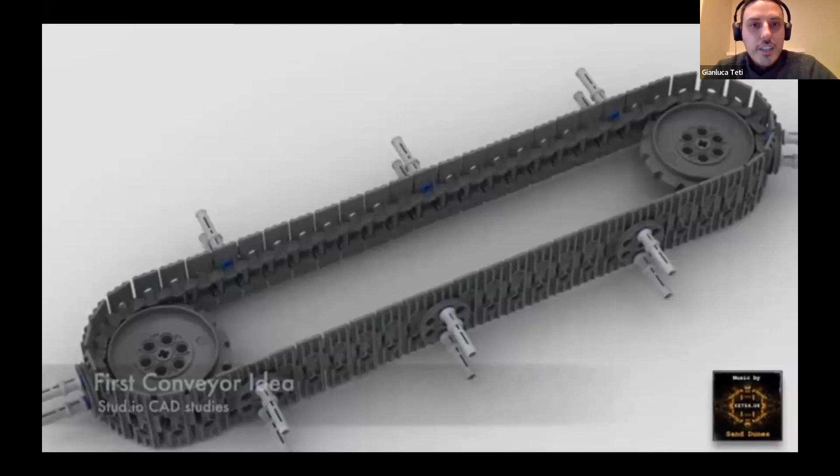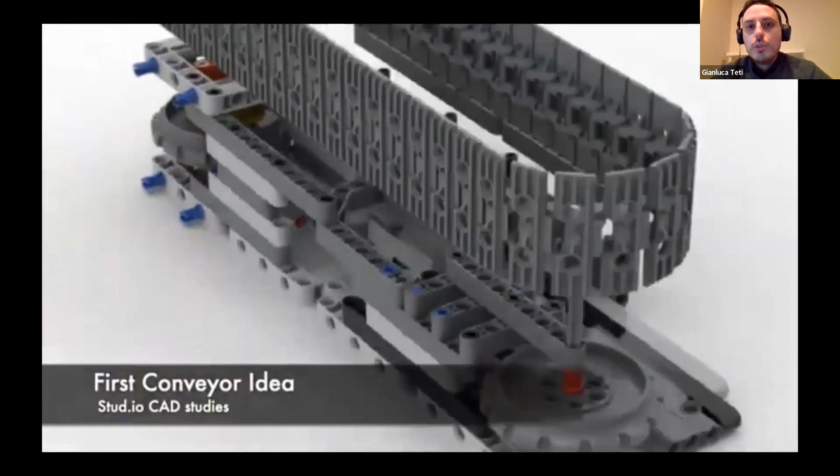I'm going to help myself with a video we made. Sorry for the presentation, we had little time to do it, so bear with us. This is the history of our Lego development, the mechanical part. Since we didn't have the Lego set yet, all we could do was think outside the box and imagine how the components could fit in reality, drawing everything in Stud.io. We started thinking about how to handle bottles, the moving conveyor, and how to better do it.

One quick interruption, sorry. No problem - the audience may still be confused about what the project does. In a few sentences, could you explain the goal of the project so we can understand this much better? What is the final output we want to achieve?

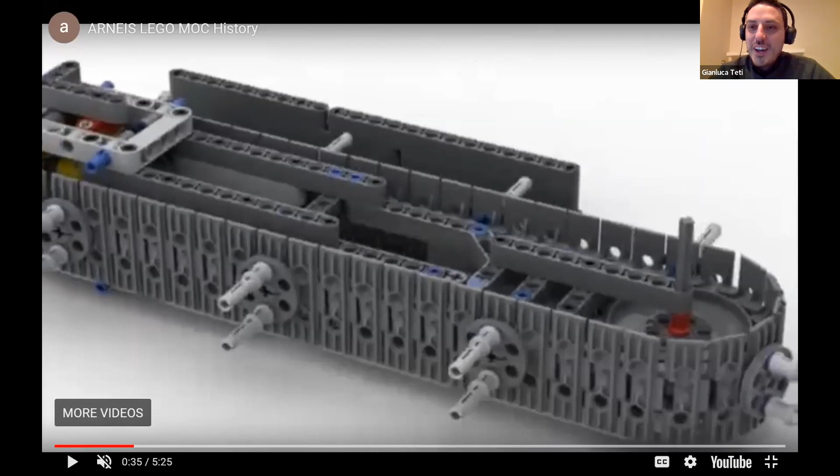We want to recognize mignon bottles that move on a conveyor, to identify and select some of the bottles present and create a sales packaging. So if you want to order 3 bottles for grandma at home, you just open the app and select the 3 bottles, and the system will see which bottles are running on the conveyor, pick the ones you want, put them in a packaging, and help the sales process.

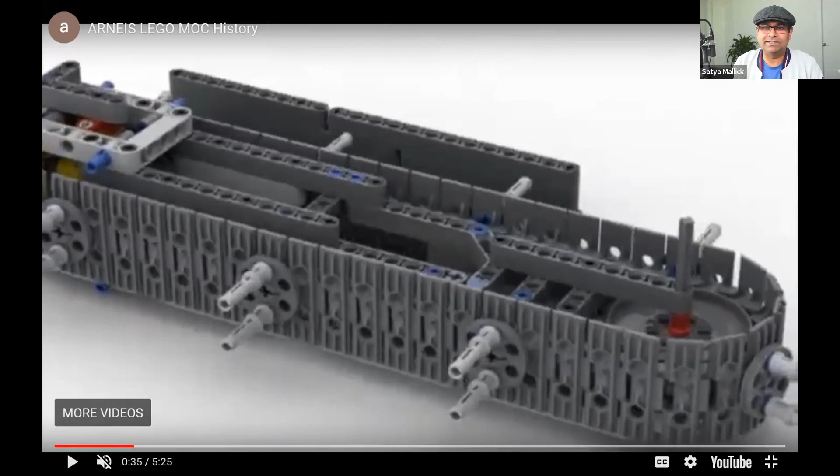So like an online gift site, they order 3, and you have the option of selecting specific bottles - not everybody gets the same package. Out of, say, 10 different bottles, your system recognizes the different wines, picks the right ones from the conveyor belt, puts them in a package, and ships it to the client. For now we're starting with 5 bottles, and the package should have 3. Of course the system will improve over time.

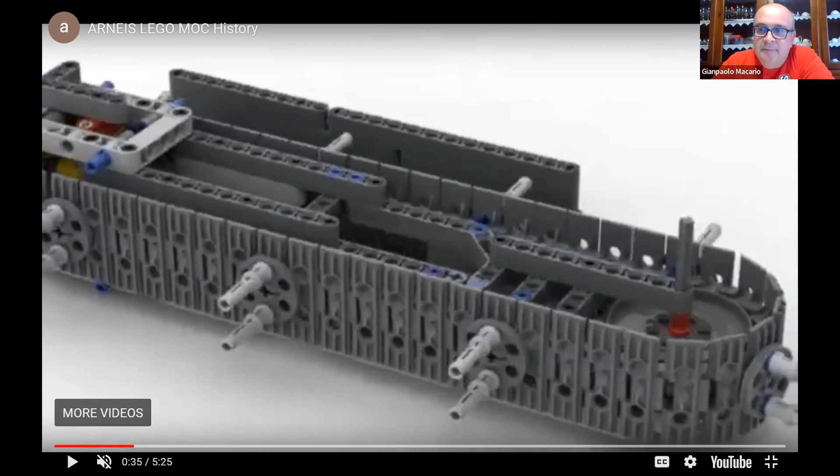Currently, packaging systems do the same thing, but they need to classify the items in advance - maybe coming from a batch or whatever. In our example, we want to stress the computer vision to identify the component while the system is running, and also learn by experience. If there are mistakes at the beginning, you take a snapshot, put it on the cloud, and reinforce the learning. This removes one problem of current packaging systems that need pre-training or labels. In our case we don't have any barcodes - they're all samples, no barcodes because they weren't done before.

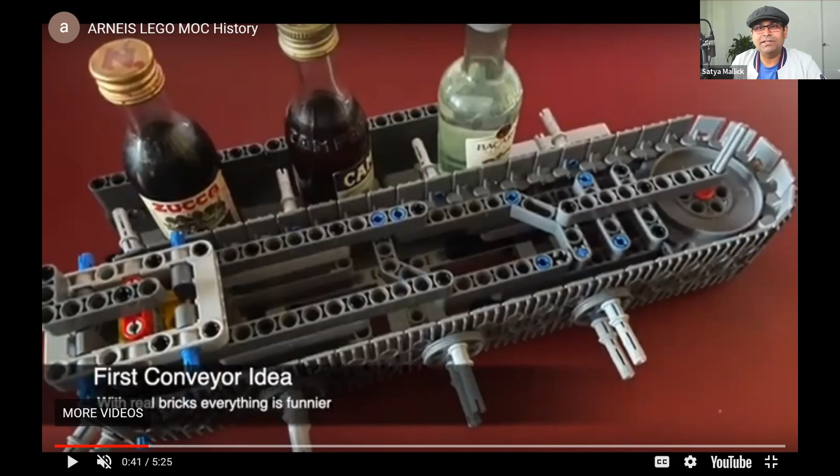So sooner or later we'll be acquired by Amazon and become millionaires - but this is exactly the problem they solve every day. Amazon would just end up paying somebody to slap a barcode on there. No, you'd be surprised how much automation is in these warehouses. It's mind-boggling. Yeah, it's one of the big adopters of autonomous robot tech - these giant warehouses from Amazon, Target, Walmart and so on.

Anyway, the problem to solve is to improve automation by removing the effort needed to prepare for it. Like in our bottling machines, we're asked to change the bottle we want to close for the same reason - we need to do training, which is really expensive and takes time.

Yeah, I will continue with the video. So this is the first realization of the first design.

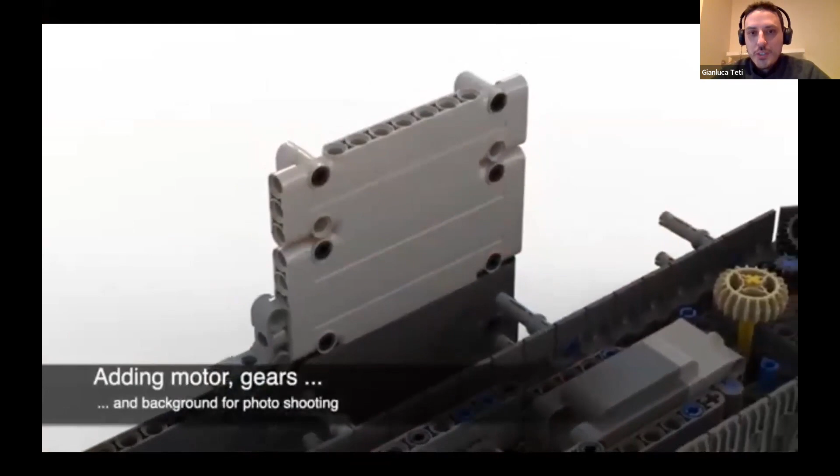Then we added the motors with the help of gearing. Once we had the Legos, we could start finally the building process and testing of the movements.

We decided on a part of a conveyor where we wanted the OAK-D Lite to look at a specific layout of a specific part without the landscape behind.

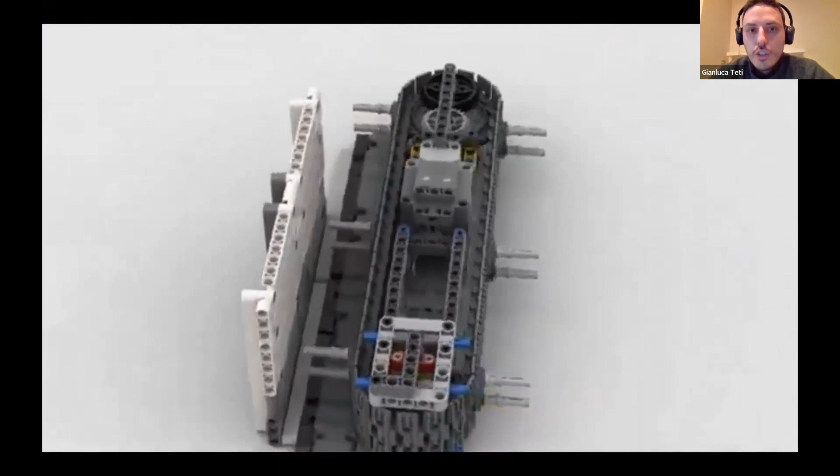LDraw helps with the animation, of course. This is not made by us, but also helps with the manual instructions. So if you are into that, please use it. It's very friendly and easy to use.

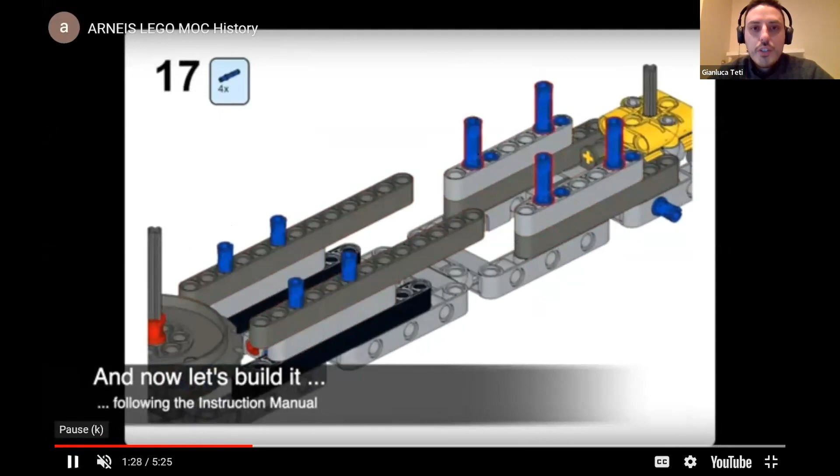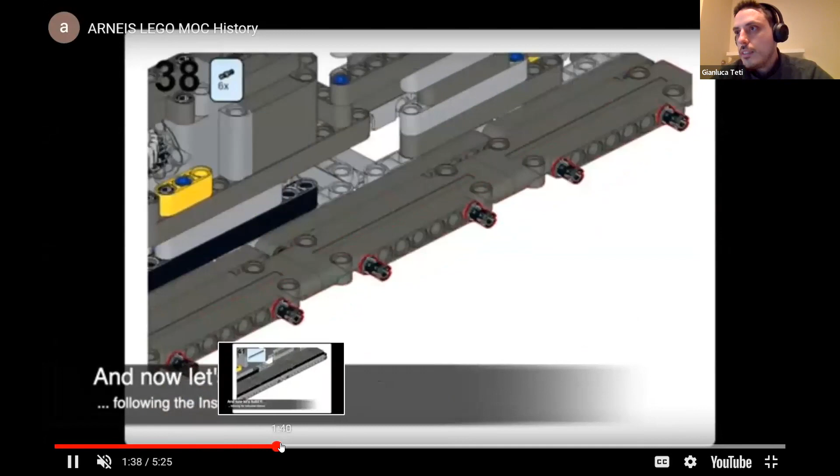Every step came with a bit of testing and new ideas on how to improve the design. I'm going to leave it at that a bit. This is a part of the conveyor. Okay, stop it.

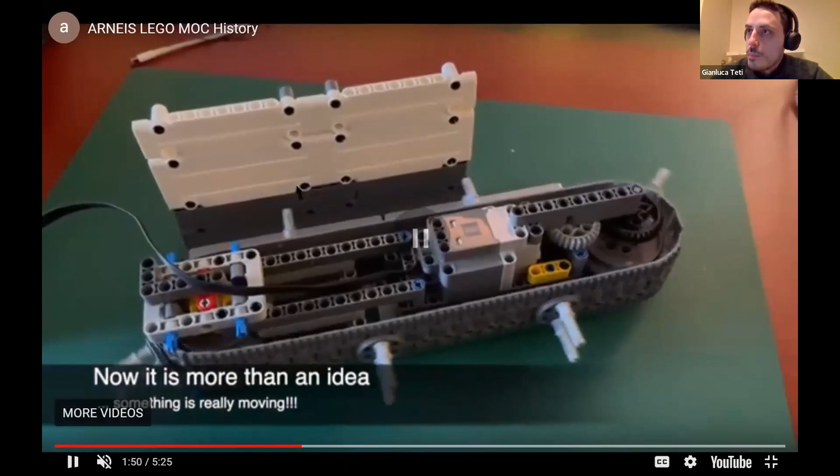Ideally, the OAK-D Lite will look at this part here, exactly where you should see my mouse. You will see that later.

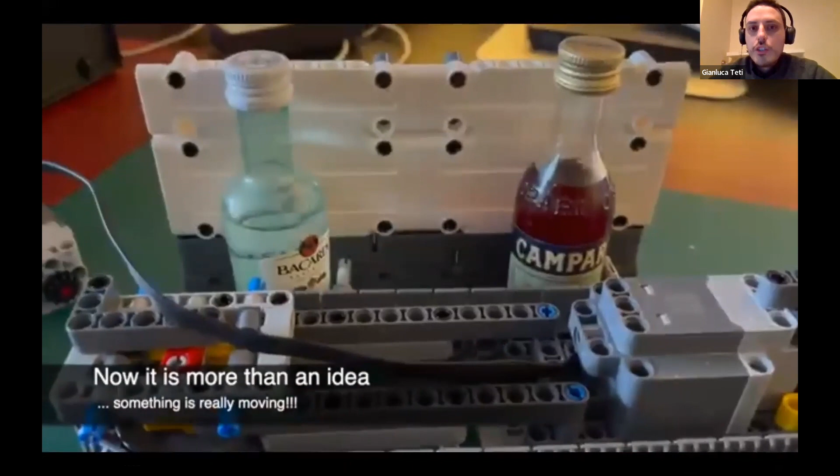We even tried the demo AI software coming from Luxonis, of course, and here you can see that. Is that running? I think it was running YOLO probably. No, I think the basic MobileNet. MobileNet, right? Yeah, the standard, the first network that you see when you start the demo software.

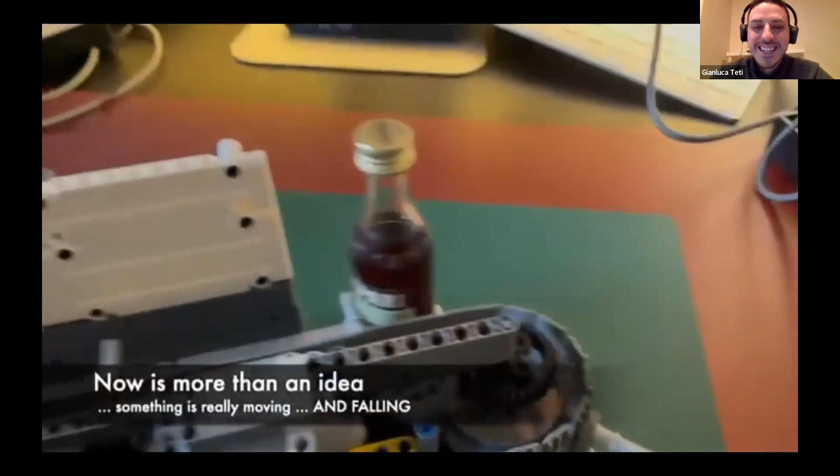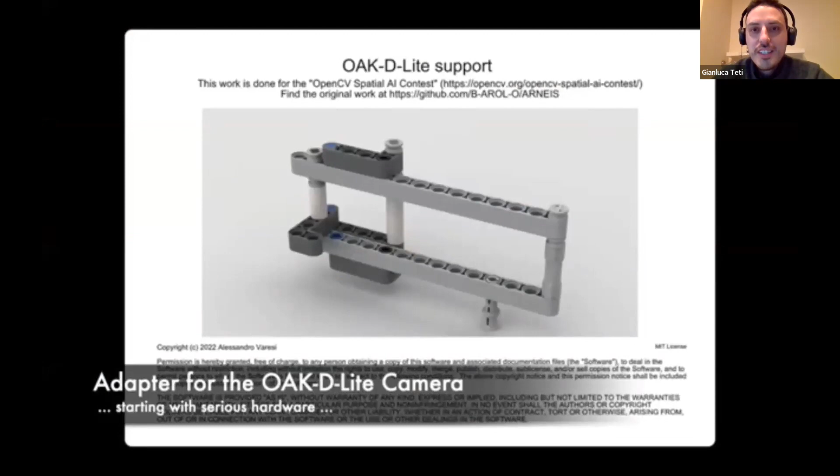Running just depthai.py. So something was finally moving, even dropping. At the same time, we started to imagine where we could position the OAK-D Lite and fit it with the other Lego parts, and so we designed a Lego support system for the OAK-D Lite.

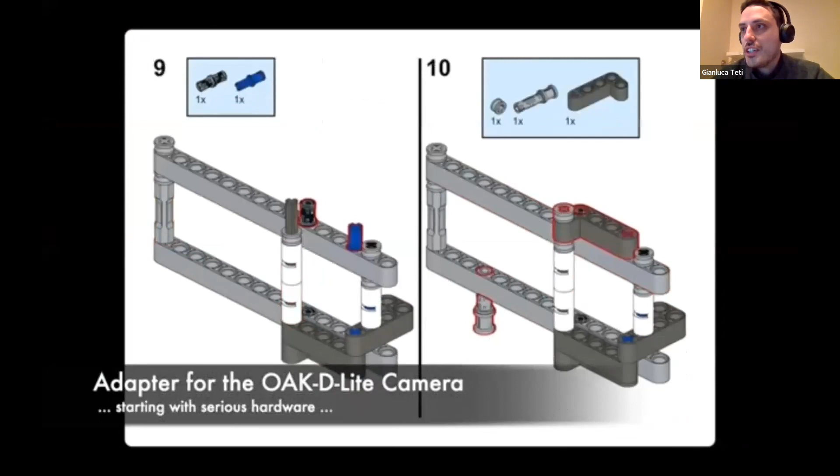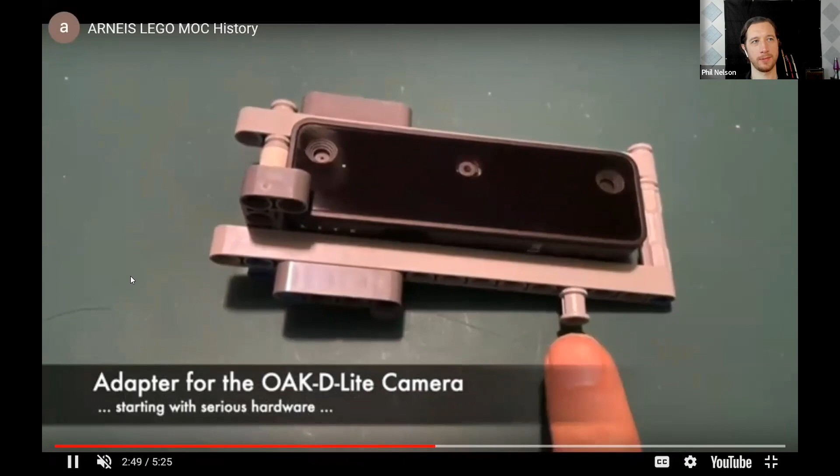In my opinion, it's very easy to handle the camera. You just have one piece that handles and stops the camera from dropping out, and you have plenty of space for the USB cable. So it's very easy to build, really a piece of engineering from Alessandro. So thanks to him.

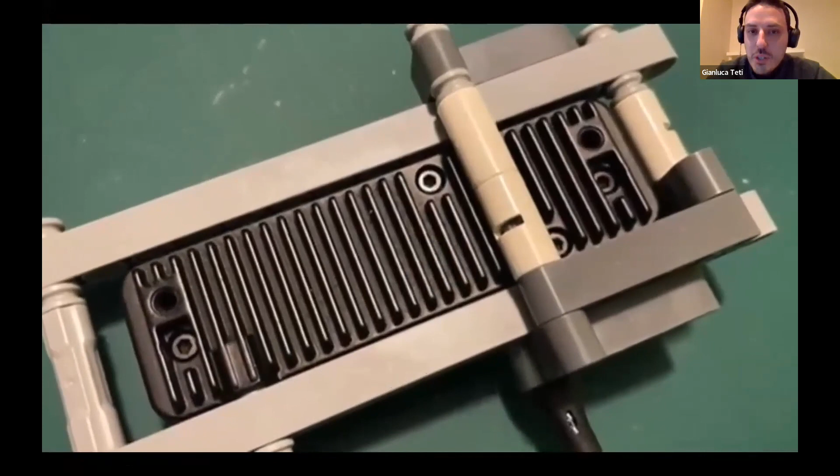One important note on the back here is that you've got to keep the back open for thermal reasons. Some of the projects we saw had a closed back, and it's not good. You've got to let the camera breathe a little bit. Yeah, I realized that the first time.

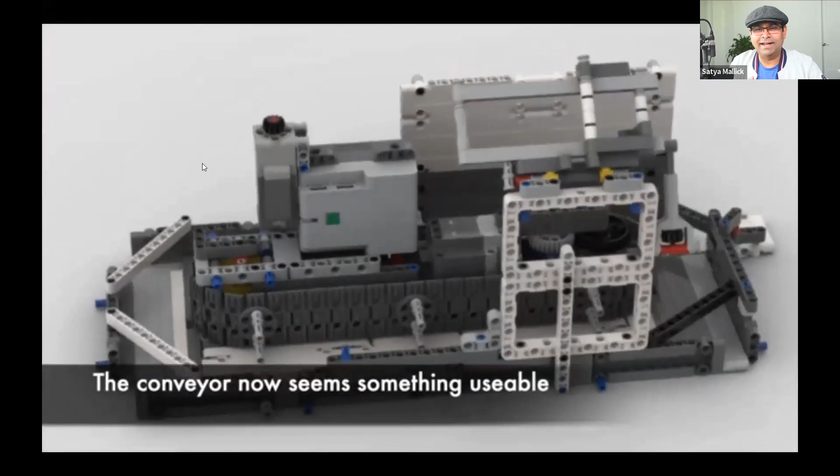Then it was time to add all the pieces together to complete the conveyor. Can I add one more thing? So many people have bought OAK-D Lites. One of the reasons for the metal case is that it's also a radiator — it actually helps cooling it down.

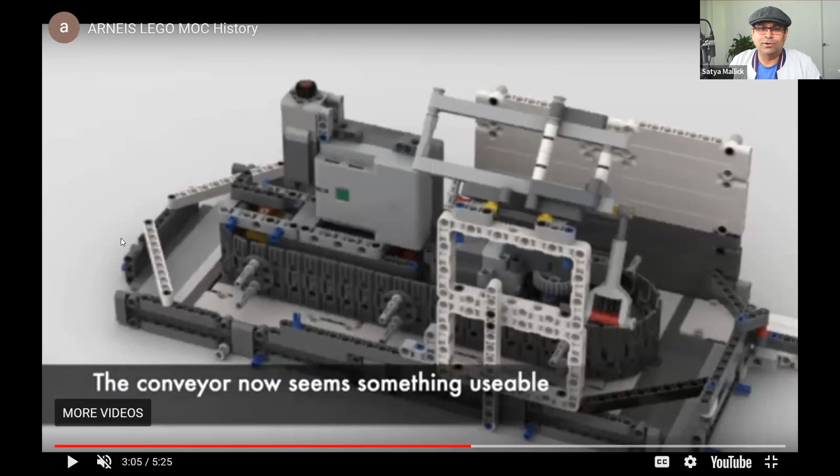So while using it, don't cover it completely, leave enough space so it can cool down. This thing can get pretty warm sometimes, depending on what you're doing. The OAK-D Lite, being a small form factor, can get warm, so keep it open when handling it. Honestly, this is one trick we as engineers doing a real job knew very well, and that's why we started with this design.

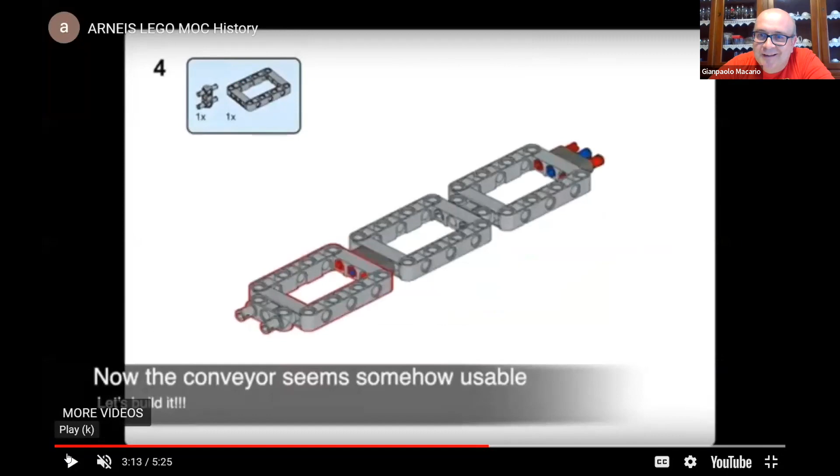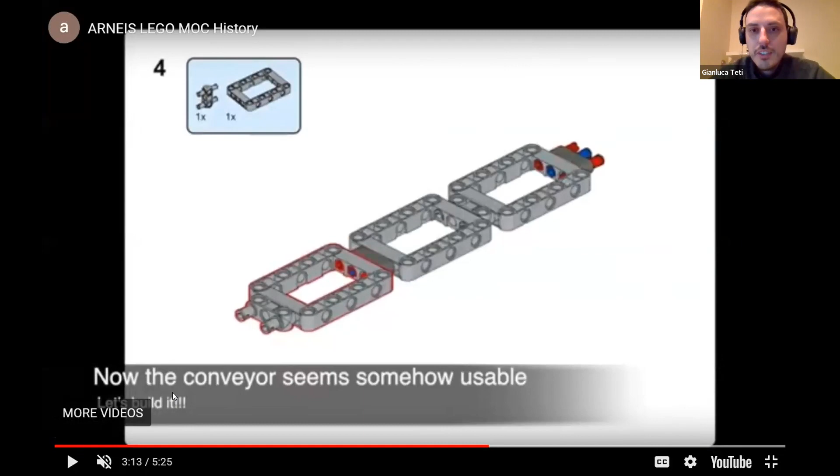But we did it in Lego, and usually we don't put in plastic. Right. So as I was saying, it was time to put all the pieces together to complete the conveyor, and here is the instruction manual rendering.

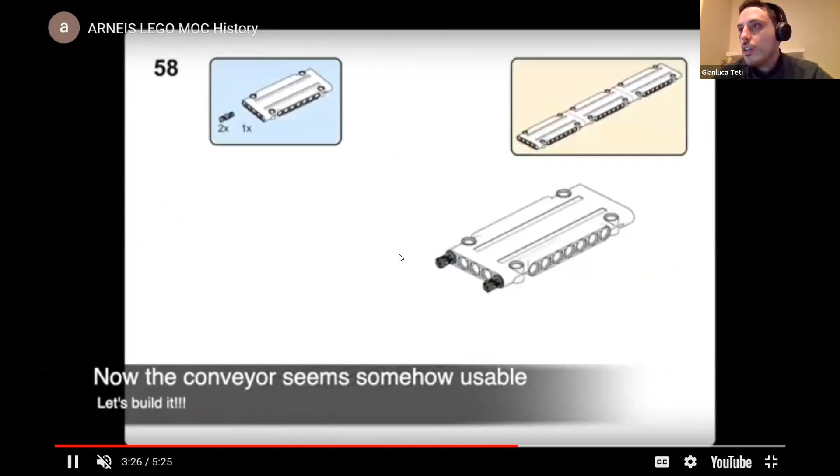The user just had to decide, after building it, where the conveyor should move. It has a function that can move forward or backward. You can see that in a bit. It's a gear on top of the motors.

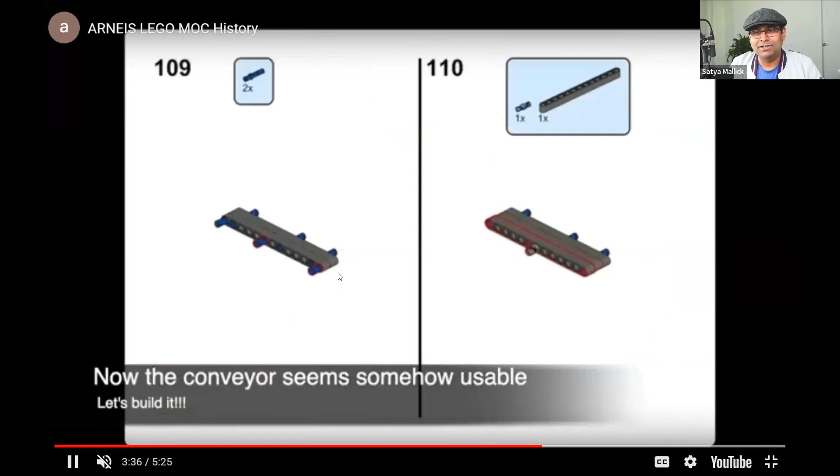What I really like about your project is also that we had shipping problems, so you could not get the real components. I don't know when you received it, or if you're still receiving parts of it. You still don't have all of them, but you were able to design all these things as 3D models, and that didn't stop you from making progress. That's really, really good.

Honestly, this is how Italians work. Yeah, we see opportunity instead of problems. Problems every day, and we're trying to be creative and solve them as we can. Nice. We are not, but we're trying to improve.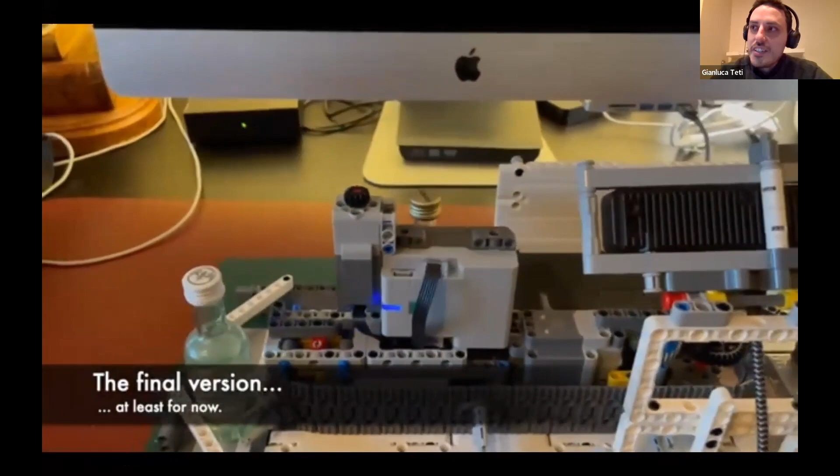So this is a first test of the running model. That's the gear that sets the movement forward or backward. You can see you've got some nice little rails on there so the bottles don't fall out.

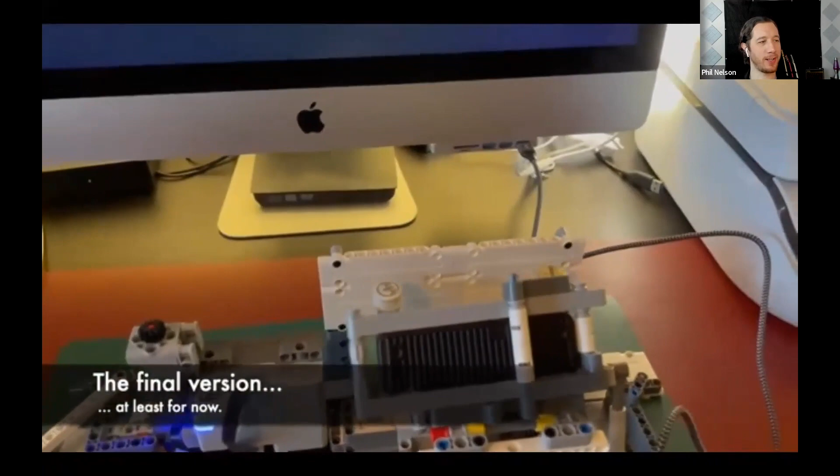It's solved bug number one already. That's the first one, of course. We have a little bit less edge on the next part. This is the final version. Me being the sales guy, I'll say everything will be solved by the end of the contest, of course.

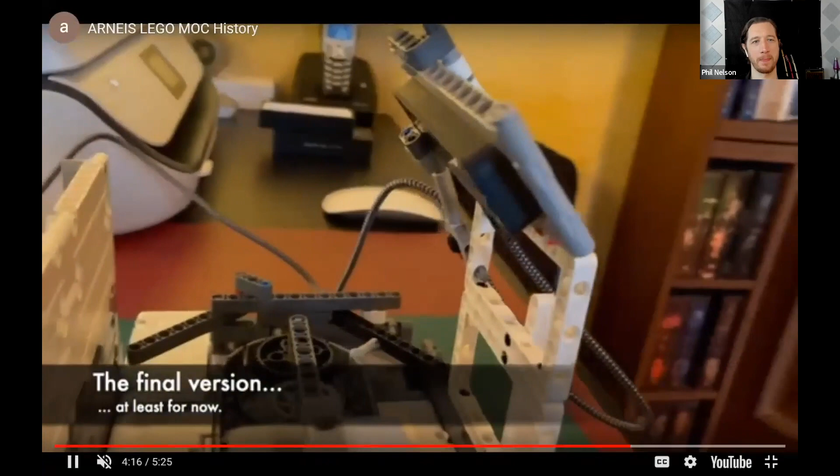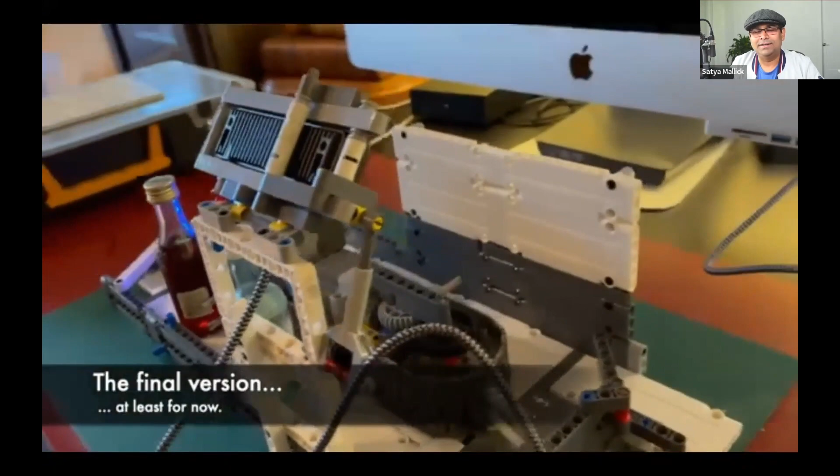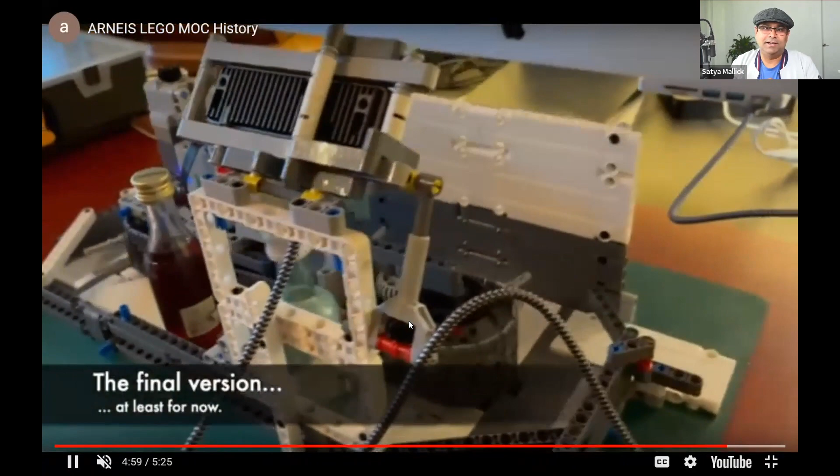The other thing I wanted to point out is that you guys clearly have a lot of industrial and mechanical design experience, but you're relatively new to AI, and this is the opportunity in AI. People from other fields who may be experts elsewhere add some AI expertise to their work, and suddenly they reach the top, because there are many fields where they don't have AI experts in-house. So you have the opportunity as an expert in some other field to add AI to your work, and suddenly your career path can become very lucrative and interesting.

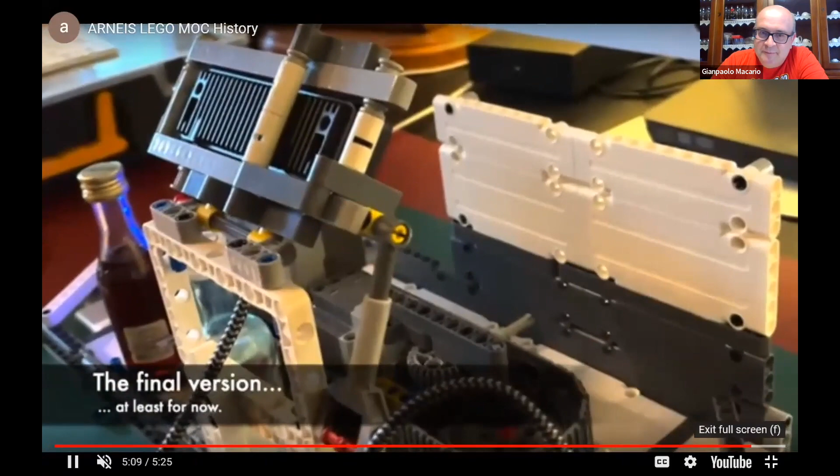This is the part our boss will not like, but this is exactly why we spend our nights and weekends, because we believe in it.

I'd like to point out that none of us is a mechanical engineer. We are two automation engineers and a software engineer, so the mechanical design is just a piece of genius. But we talk with real mechanical engineers every day, that's why we're aware of the problems, and we're trying to solve them elegantly with Legos.

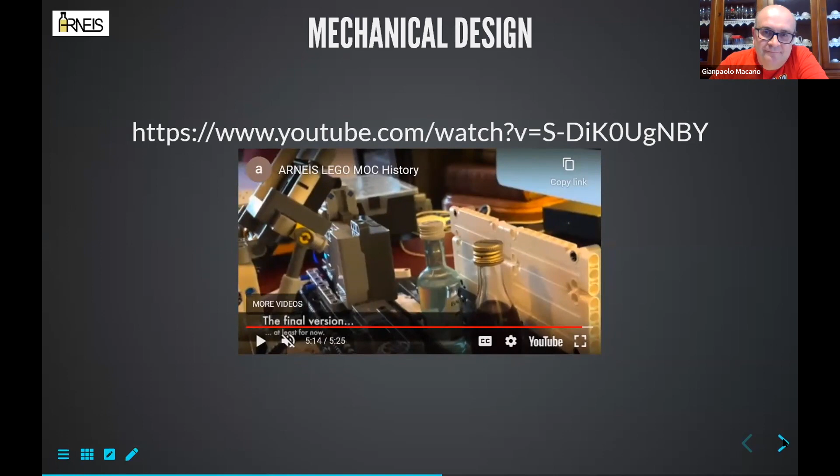So for the next part, at the same time we were working on the software. I'll take a step back: it was Christmas time, and we just learned that we would be one of the 50 teams competing in the OpenCV Spatial AI contest. Personally, I didn't know much about it.

Sorry, I went too far. Sorry, okay, I didn't know much about OpenCV.

So the first thing I did, like any newcomer, was go on Google and search for OpenCV. The first thing that came up was a link to the OpenCV YouTube channel, a 3-hour course that I took entirely in my own time, away from my job. And this is the first result I got using my computer camera - that's me, of course.

And after that, like Alice in Wonderland, we started to follow the white rabbit down the hole of a new, exciting world. We didn't know anything about DepthAI, TensorFlow, training neural networks, or machine learning applications - it was all a new world to us.

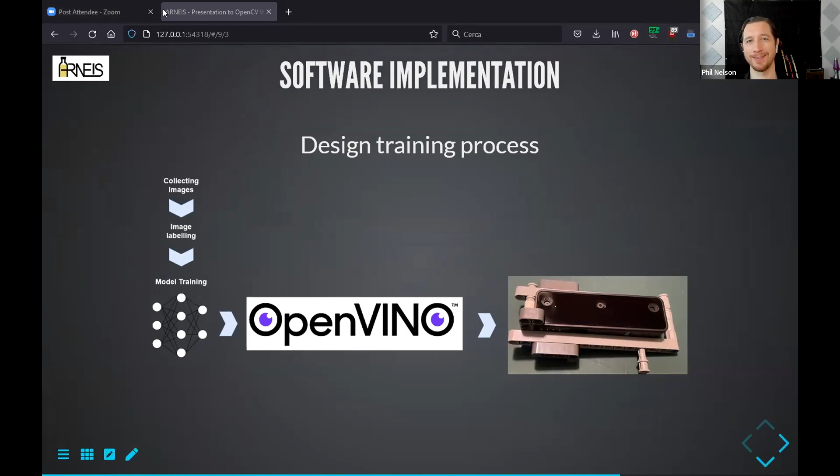After all those magic steps, and believe me, not so easy steps, you can finally use OpenVINO to convert the trained frozen model and obtain a blob file to run inside the Oak-D Lite. The OpenVINO step is very important for performance and many other reasons - another one of our good friends. Without using the OpenVINO step, you cannot run on the Oak-D Lite.

But OpenVINO is also useful for running it on your own CPUs. Let's say you have an Intel CPU and you want to make it very fast. I have done it several times in our projects where we get 2x, 3x speedup for free by just using OpenVINO, and the accuracy decreases very marginally, if any. So something to consider when you're deploying on CPUs especially, which, by the way, for deployment, CPUs, VPUs, etc. are used a lot. GPUs are so expensive, GPU instances are so expensive, that a lot of computer vision is actually deployed on CPUs. And for that, definitely use OpenVINO.

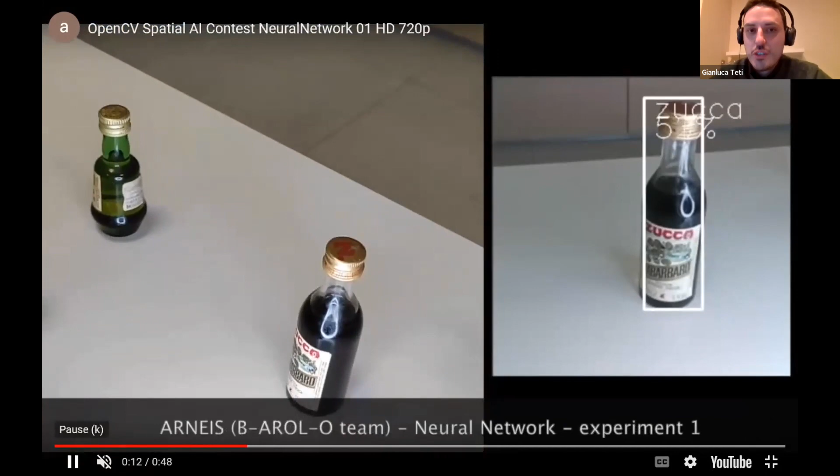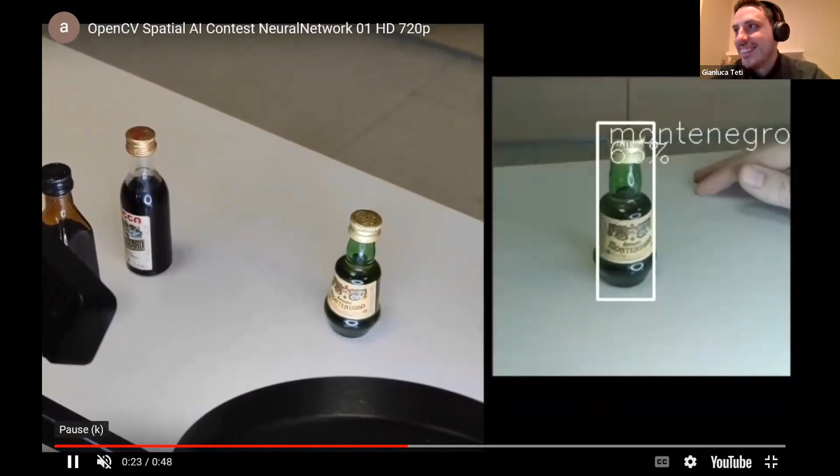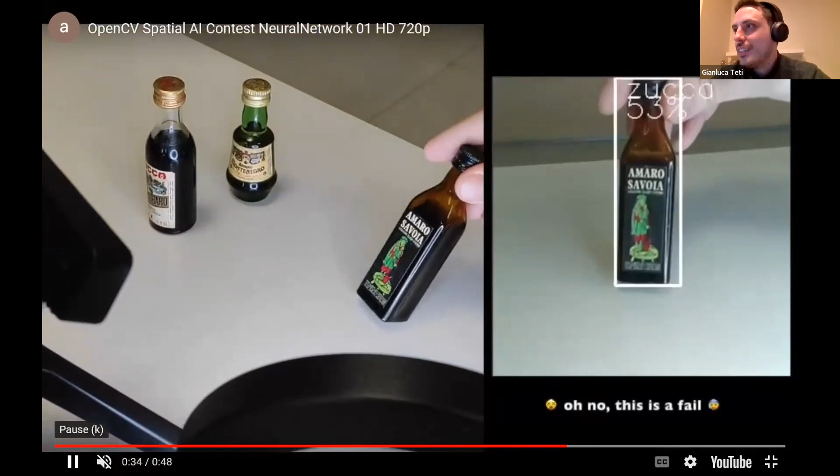Every step that we took involved testing. So here is the first test without a conveyor, of course, just trying what we have trained, to see the results. And of course, I'm not going to spoil it - the first two almost recognized, and the third one has some problem involved in the identification. So the model needed more experience, of course.

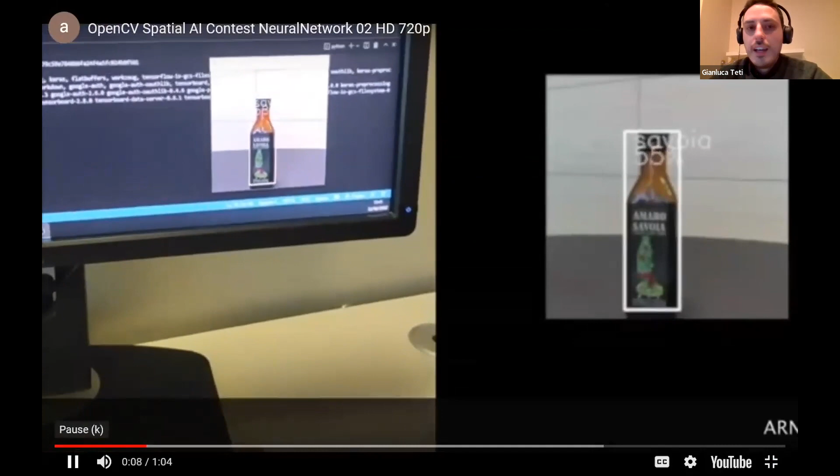Or we just break the bottle and we don't have the sample any longer - this is what in a real project we would do, not in the contest here. So we trained again the model with a different set, with a different position of the images, different illumination. We even bought an illumination system, and this was a little bit better than the previous one.

We even added some pictures that had an obstacle in front of it, so that the training would be a little bit more solid. And even if the light was the same from the one that we used to take the picture, just a couple of different centimeters of difference from the picture to the real case was enough to not see the same bottles and recognize it.

So the major issues to complete the project are three: there is not a data set of images of those mignon bottles, so every image used for training purposes has to be taken manually.

Can I suggest something? Yes, please do. So because you guys are so good at 3D rendering, what you could do is actually create a 3D data set, because these bottles are very easy to model - it's a very standard bottle. And the label, you already have the label, so you can create a synthetic data set very quickly, and then put it in whatever environment you want, whatever orientation you want. You can generate millions of images. There's tons of free super high resolution environments as well, indoors, outdoors, different lighting, stuff like that. Yeah, you could just drop it into like Blender, I feel like.

Especially because you know how to do this, and the number of classes is relatively small, right? You're using, at least for this competition, five different bottles. You will nail it, even with synthetic data. And it's good that you've collected some real data too. But even with synthetic data, if the simulation is reasonably close, you will nail it, almost 100% accuracy.